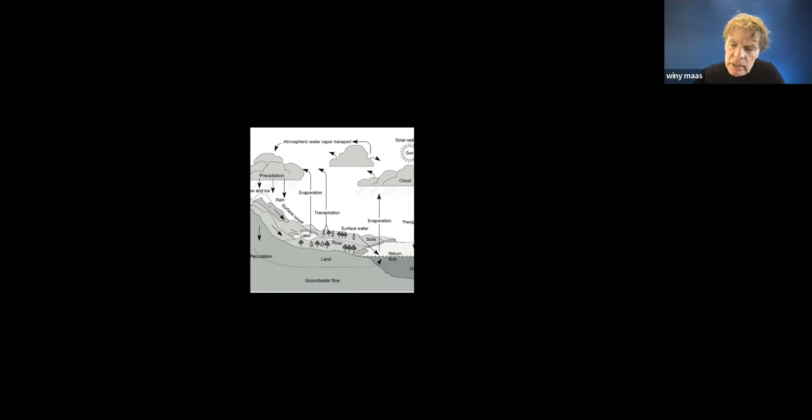Climate change and urban space. I would like to start by saying that everything we do is somehow touching the cycle of water, the cycle of temperature, the cycle of life and biodiversity, and what we do is interfering in that cycle, helping it or killing it.

What I would like to go through with you in the coming three quarters is this series. I want to talk about the monitor, how to measure our influence on this cycle, and then go to the almost chemical substance behind it, from oxygen to delta of temperature to water to watts and joules to CO2, and then end with what's next, the perspective of afterwards.

Chapter 2, the monitor, to start with, and there we can measure our efforts. At the moment we're trying to do it on two levels in the office. One is the carbon calculating, to see every time how good we are in that perspective. The second element, which has an urbanistic component, is the footprint calculator. The footprint calculator has more elements: lifestyle comes in, compensation comes in, the bigger scale comes in terms of mobility, and food production comes in, because being vegetarian is anyway better to help the planet these days.

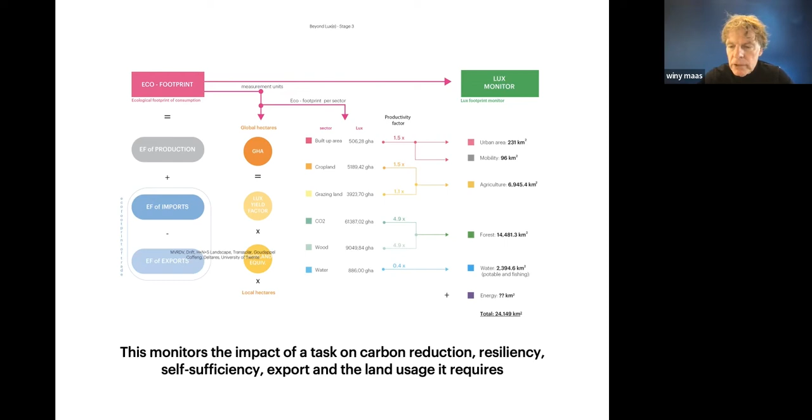So how do we monitor these actions and impacts? That is a wide scripting that this team is developing at this very moment. This monitors the impact of a task on carbon reduction, resiliency, self-sufficiency export, and the land usage it then requires. You can see on the right side it calculates this with every piece of action that we do.

If we look first at Luxembourg's footprint as it is now, with the tasks we imagine, and measure it with this ordering principle, then you could see that currently it has a footprint of 13.8, which is unusually high—on the same level as Singapore, basically. So if we do business as usual by 2050, we need 14 Luxembourgs to compensate for those activities. What we can do technically, with a lot of measurements, is bring it to 3.3 by 2050, having this effect of decarbonization.

This could also be done with the help of the neighbors, because they have lower density and other kinds of qualities, meaning we can do this action in an easier way. Then we could do it with 1.5 of Lux plus—that's what the footprint means in that case. This has a political impact, for the discussion of the different regions. It also has an impact on the speed of things—it could go quicker, even with a fallback scenario, and that's what you can see here.

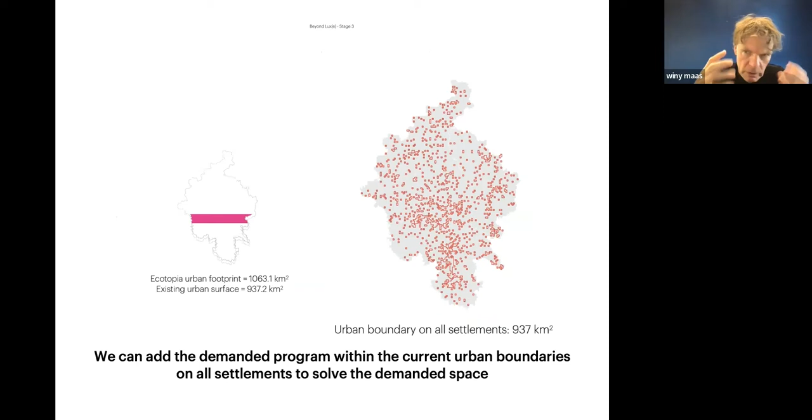I'll give some examples for urban areas. If we keep the urban boundary so it doesn't grow out of the settlements, and even densify the places which are over 100,000, then you get this kind of map.

You see the footprint calculator on the left changing. And if I do it even in key commuter cities to use that as a core, I get quite an effect, both on the map and a kind of stability in the countryside. Even if I imagine doing it only in the Luxembourg capital, which is doable, you get this densification.

It leads to a kind of Paris density, but it would also be beautiful. That illustrates a little bit how this slider works.

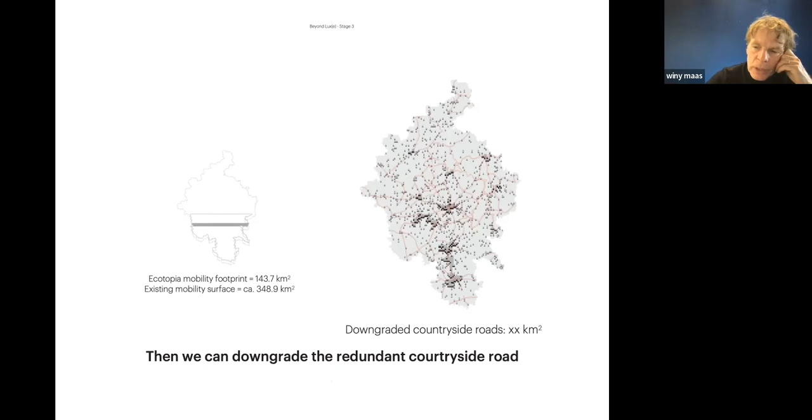For mobility, it's the same, connected to that, where we can strengthen public transport or other means like rapid train connections, and you see the map changing. Then we can downgrade the countryside roads, which is actually sometimes very stimulating, and ban through traffic in smaller entities, one of the measures taken into account to get that mobility pattern working.

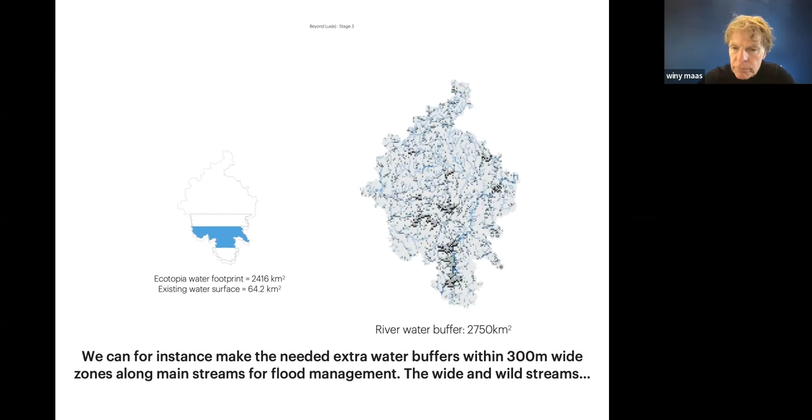For water, similarly, this is the water buffer needed for resilience, for not drying out, forcing a kind of anti-evaporation program in this area. That can be done in the rivers, widening them roughly double in width, and we can also do it locally around extra lakes, giving you a kind of sawa landscape that surrounds these components.

We can continue with the forestry part for the balance I was just painting for this decarbonized country or region. I need to add forestry, even though it already has quite some. We can concentrate it in the north of Luxembourg, which is beautiful.

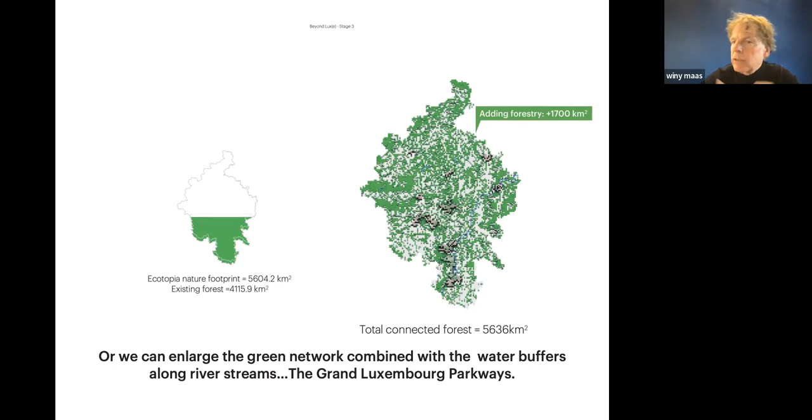Then it simply becomes a national park. Done. Or we can do it again around the water buffers in the valleys and next to them, and then you get this kind of network, which has other advantages. These things help not only to make acts but also to see the impact of a certain kind of act.

To end with energy, a similar question: how can we do it with agrivoltaics, always in a double layer so you can still harvest below? I'll come back to that later in the lecture as a tool to do it.

This is what needs to be covered in the landscape. And if we also add some windmills, needed according to many people because of vulnerability, then you already need this amount of energy landscapes put in. This is a lot, and there's a lot of discussion on windmills, whether you want them everywhere, because you also become crazy of it.

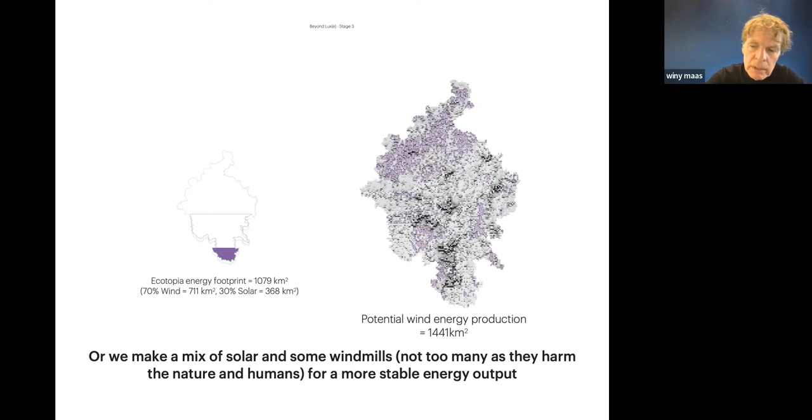That's a bit the task. Now overlaying that combination and interaction, you get these scenarios and directions coming together. This is done on the integrated map, and we can then zoom in. Here you see some of the zooms to illustrate it more physically, what it can do.

Is it good? Is it bad? That's for judgment, and that comes in. I'm very happy that the process is now starting to develop it more deeply after the first half year of study on this calculator, combined with all the juridical and political forces in this country and region.

I go to the next subject.

Now to go into the chemicals of our architecture and urbanism, say oxygen. We did this study on the Green Dip, a book which comes out soon, where we look to the urban mass, urban areas that is about 3% of the landmass of the world, larger than India. When you compactize it without roads, it's more or less like Madagascar.

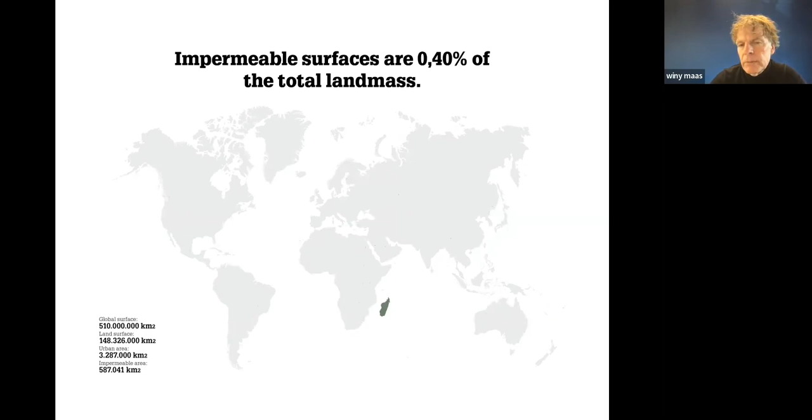This Madagascar-sized place has 56% of the people now, and will be in our decarbonized environment 68%. They behave actually heavier, because that means the cities of the future, the environment of the future, are responsible for 70% of the CO2 emissions, 60% of the fresh water consumption, and 75% of the energy use.

We take this to a global scale, and we can see that we would need to compensate already 3 times the planet to balance that out. That leads to compactization, also finding techniques and technologies that improve and compactize that.

For instance, hypothesis: if this is Hong Kong and I would greenify that completely, how much would that contribute to these different components surrounding the oxygen measurements? Or if I do it in Beijing, then suddenly Beijing becomes wonderful, I would say.

So we developed this green maker with The Why Factory at TU Delft to see how far we can come. It's basically a program that shows all the species of the world and what they need in terms of soil, temperature, water management, clipping, and what they give in terms of temperature drop, evaporation, or water captivation.

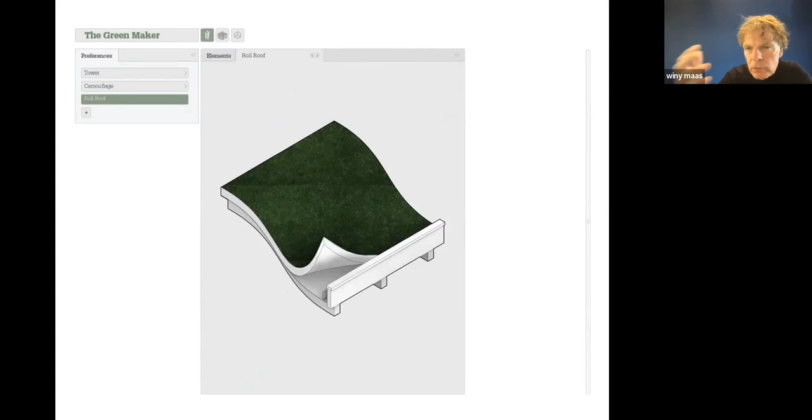Noise reduction. So if we apply that knowledge to products that you can buy in Walmart or IKEA, and see how that tile would look, or a roof, then I know what I can do with such a kind of material to improve it.

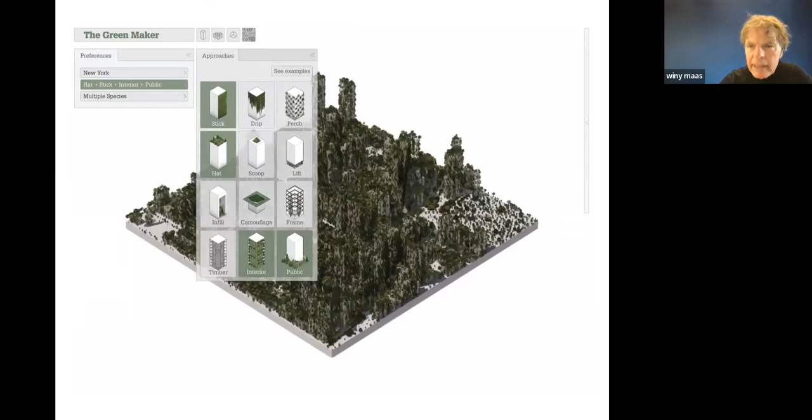If I then apply it on a canvas, like in this case a piece of Manhattan, somewhere around 160th Street I guess, what can we do on that place? I can choose material, clad that over our soils, our roofs, our facades, and into our interiors, and see how much that would help for this piece of Manhattan.

Quite a lot, in that way. That is more than I expected. This is a beautiful Fifth Avenue at the moment, and it becomes somehow much nicer when you go around and see how Manhattan goes from a brownie to a greenie, and then later to this kind of interiors, is what this effect is showing.

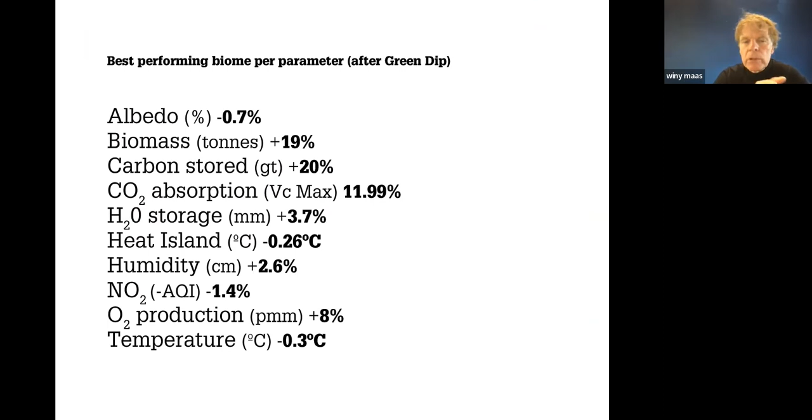So what would that mean if we do that with all our flat roofs only, not only the facades? Then the albedo will go down a little bit, the biomass continues to go up, we produce plus 8% of oxygen, and we drop temperature by 0.3 degree over the whole planet, which is substantial.

This goes hand in hand, of course, with biodiversity as the next task to do. The book that we are now preparing, also in The Why Factory, is to calculate more or less the habitats that we can produce with that.

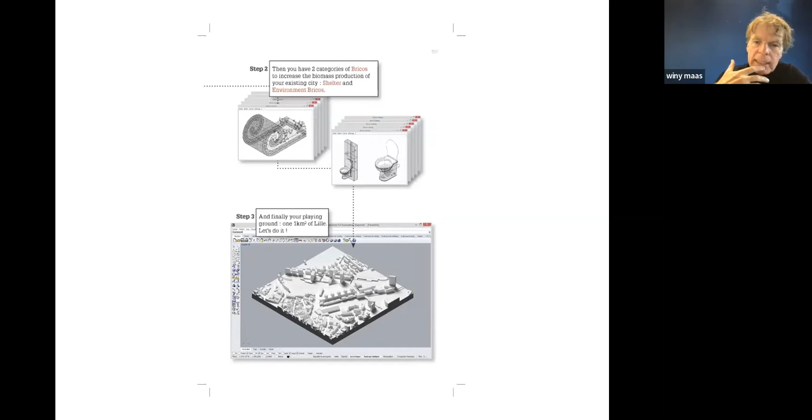So that's based on food chains that are interconnected, and calculates basically the surface and the treatment combined with the products that I was just describing, applied on canvases like below in this slide.

You see some of the products made with different companies, and how that could be imagined on the facade, on the roof, on the streets, leading, like in this case of the North French town of Lille, to somehow a 'wow, this is better than Borobudur' kind of feeling, and how our fellows are living in this. How far do you come?

I don't say the wolf will be here immediately, but all kinds of amphibia will then also be in the center of our towns.

And do we hate them then? Do we want to protect ourselves against mosquitoes? Of course. But then you have to compensate again with other kinds of birds and other kinds of predators that help out in our exercise.

How do we apply that further? I'll give you some cases. In Rotterdam, for example, Rotterdam used to be nice, cute, Middle European, and then boom, it was bombarded in World War II and flattened out.

And at that moment, it led to an urbanism of objects. Some people say it's bad, and they refer sometimes even to Las Vegas. On the other hand, if objects are nice and kind, if they show generations, and if the next generation has respect for what was before but adds or compensates, then it's actually a kind of intelligent dialogue. It's almost like egos become we-goes. That's what's happening a bit in Rotterdam, with this kind of responsibility in combination with respect.

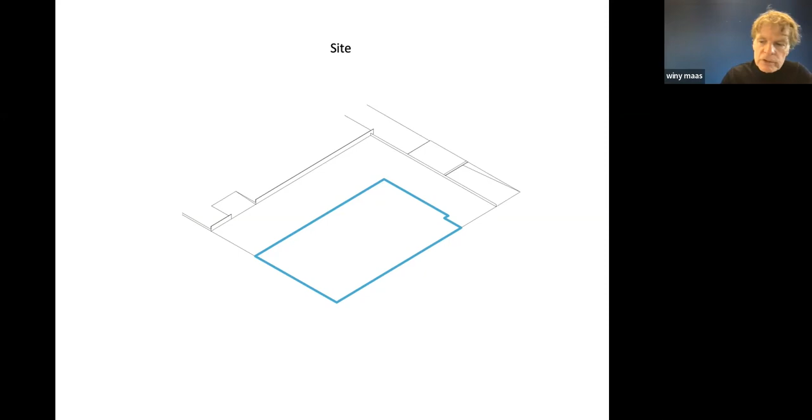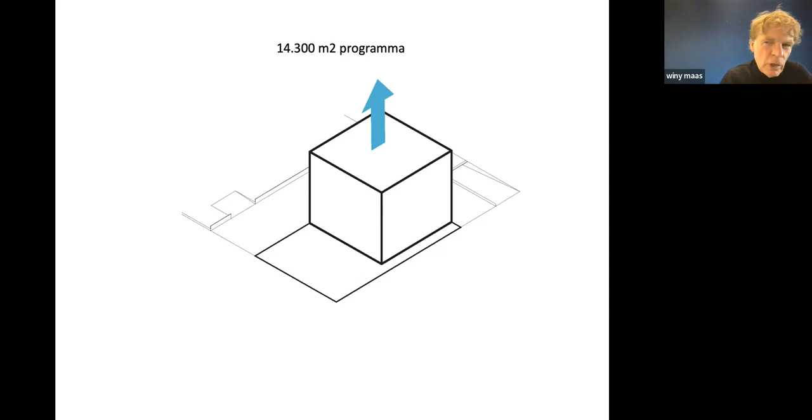There are, of course, routes in the park. This is the program. That's big for a park to put in. So how can we make a building that loves the park, or that people start to love and understand that it contributes to the park?

By making it, say, circular, you can walk around, no corners, no danger when you walk around. We shrink the footprint, minimize it so that the plaza is big enough and the effect on the foundation is concentrated.

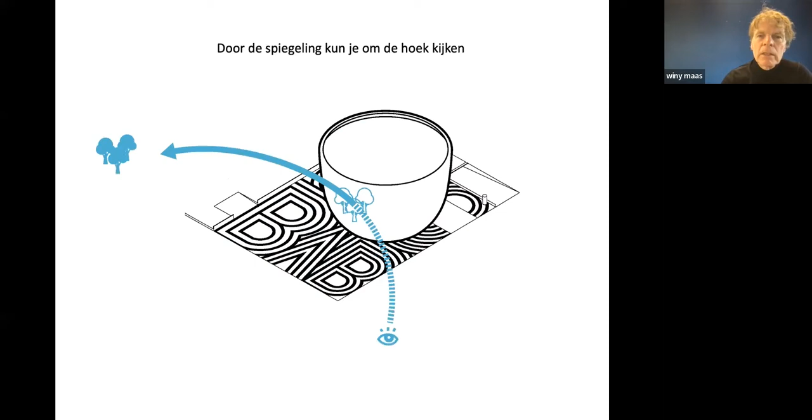Then you make the roof terrace as big as possible, and that leaves space for all this routing. If you then clad it with mirrors, we could imagine that the plaza looks bigger, that you can look around the corner, and that you can see more sky, echoing the famous paintings of the Netherlands by Ruisdael and the 16th, 17th century.

And it's a way also to host the trees of the park and put them on the roof, turning that into a collective extension of the park.

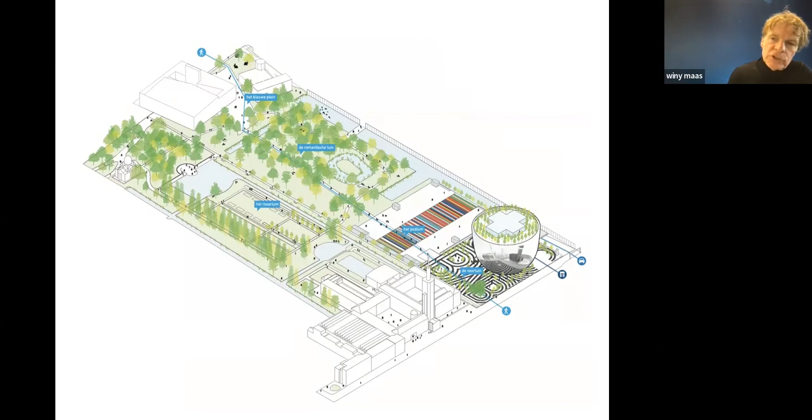Then I could imagine that it forms a part of the park, this sequence of rooms, the museum park in this case, that have been made over time, where this is the front room advocating the relationship between the small spot and the bigger park.

Because it would change this perspective to this, where I can see myself, I see the artist, I can see the canvas, I can see the park, I can see the sky, and I can see also this Fata Morgana on the roof.

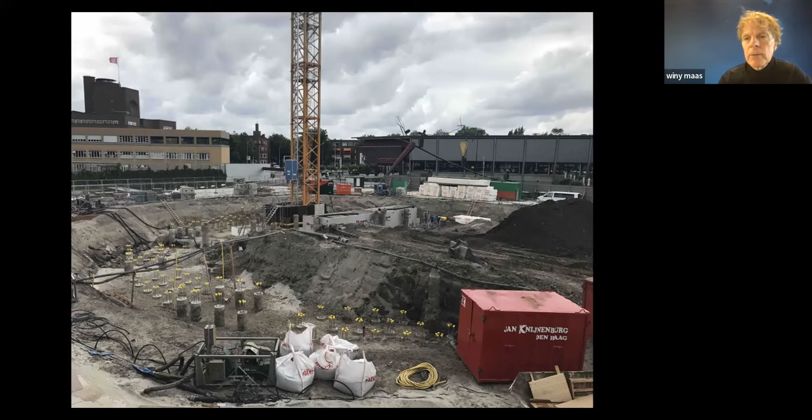This has been made with the least amount of impact on the water inside. So small tube foundations are made, a bit wobbly, then stabilized with this ring on top, and that leads to this—it's actually a kind of boat that has been constructed at this water level.

It's clad with mirroring glass made in Shenzhen, made by computers, triple bent—the good thing with glass is that you can recycle it and bring it back to the oven, and then you can do it again if it doesn't work out. And that is how it's tested.

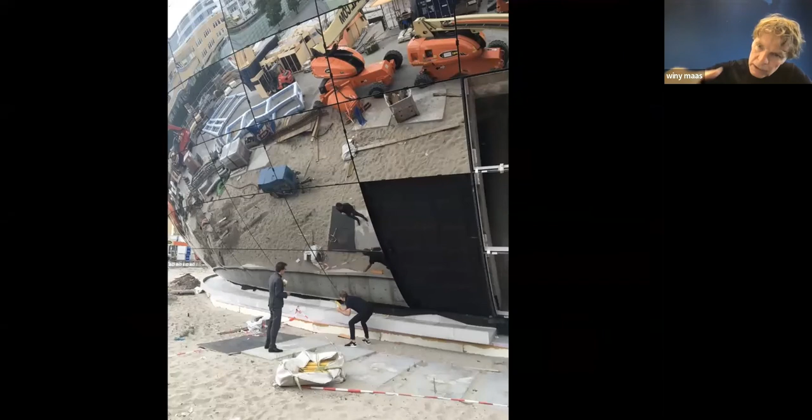And even the lowest part is the flattest, so that it becomes horizontal, expressing that this Ark of Noah is floating almost on top of our sea.

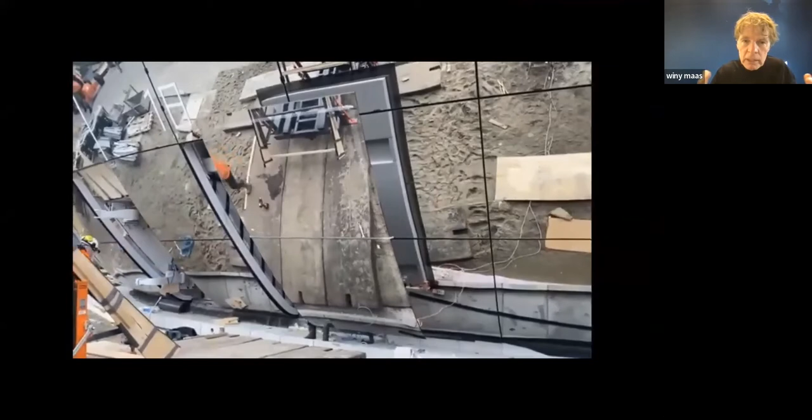Then you make doors, like James Bond, opening themselves in a slow way—it's perfect. When it's closed, it opens up, and then you can go into this depot, celebrating the opening act of an archive building.

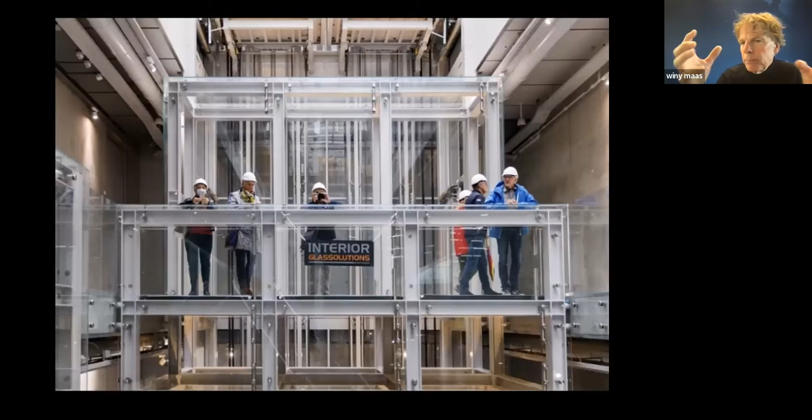And then you enter basically this prison, you can say, but where all the five different climates surround this space, a space where you can walk through, where all the travelators and lifts are in, where many boxes are hung to show the art, to pull it out of the racks and show it here, and to understand. You can then look from the back to the art and to the front. You can even walk over it at a certain moment.

And then the surrounding streets, you can open the windows and the doors, you can look at it. You see this random collection—no, not random, scientific collection—of different buildings, different pieces of art. And they are sorted by material. Paper has another kind of climate than paintings.

And then you go in and you can open the racks, and with the help of the people of the museum, you can find this collection. Actually many surprises, when Ruisdael is next to the Mondriaan, or amateur art is combined with high-end art. So the journey continues, you look more up, you see more art, your temporary art piece where pieces of the collection are gathered and turned into this carpet where you can walk.

Over it, so you can walk over the Mondriaan, I would say, and see how the effect would be at that moment. And then you end your walk on the roof with a restaurant, which is an art restaurant where things are brought in. Every space helps to get a piece of art in it.

And in the forest, I want to show that forest because it is kind of a tech forest. They are planted, these trees, they've grown the last four years. They have flat roots, and these roots are intertwined so that we make this connective soil. They are shielded by windscreens around it, and with the pockets in between the buildings, and that leads to this experience. So this is after one year of planting, now to be seen as another place to exhibit.

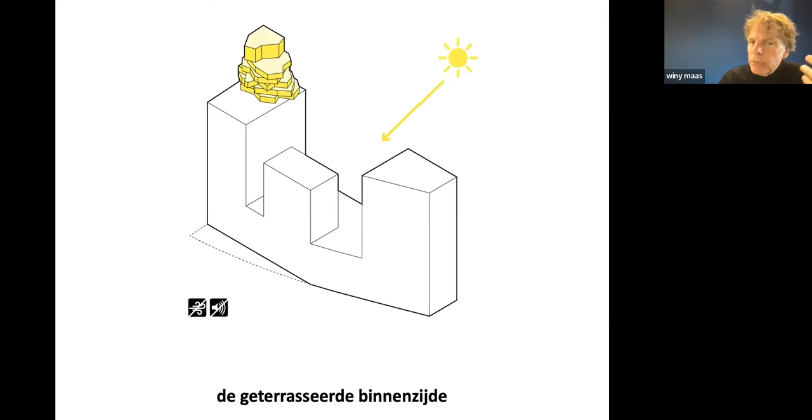I take you to Amsterdam, to the local business district, where we add a new mixed program, which has this volume according to the urbanist: three towers and a plinth. But you know, it happens everywhere, where we scrape away these towers so that I can make terraces and bay windows that help each other and bring it to the bottom, so that then I have like a scraped away, new block that shows the transition from a classical environment, which I still respect, to a business environment with mirror windows, and then bring this new life into that.

And I plan together with Piet Oudolf this green valley and test how it will grow with planters that are part of the houses, not sticking out in that way, but part of the whole operation, and then it becomes this kind of object with this kind of render images that we know.

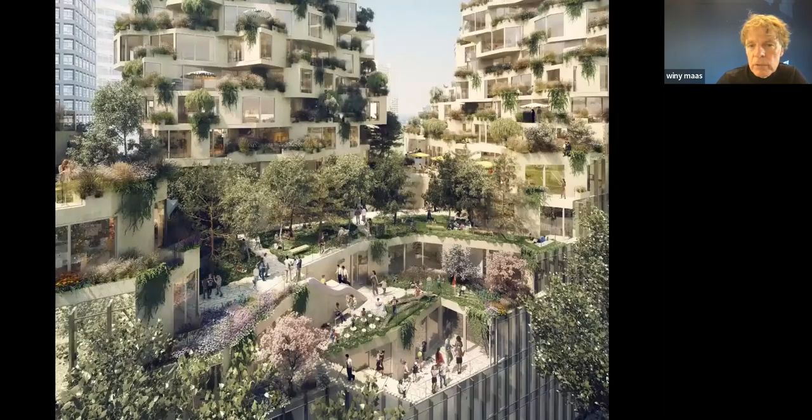And of course, this needs to grow, I'm aware, and Piet warned me also that it takes time. So we need to train our plants like we did in the depot. And that's what we currently are doing.

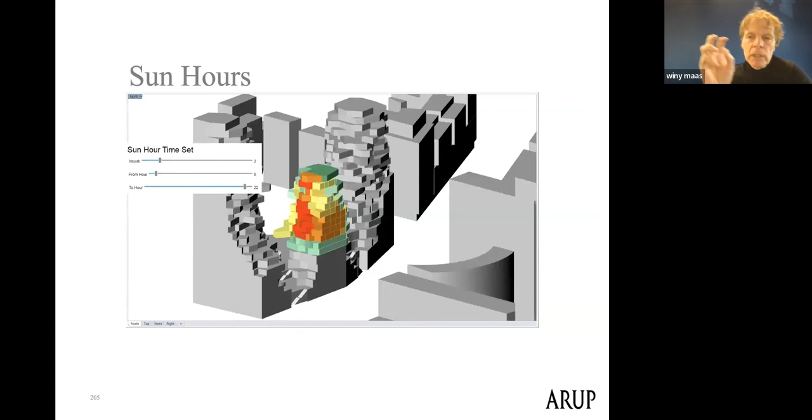We need to script that complexity because of the wind, the sun hours, the costs of developers. You see it inside and outside. We have to check the sizes of the terraces and the windows. And this program also, again, balances this out. And that is transformed into this Revit model with a structure behind it, with all the ductwork that's needed for these landscapes, and to bring it in, and leads to this building as it is now.

So I take you to walk through this valley, where people live and can bring beer to each other. Every Saturday I imagine there will be barbecues, and the building will turn into a smoky area, with people always having these trees as part of it. The irregularity makes housing that always has an extra space where you can sit or put something you couldn't otherwise.

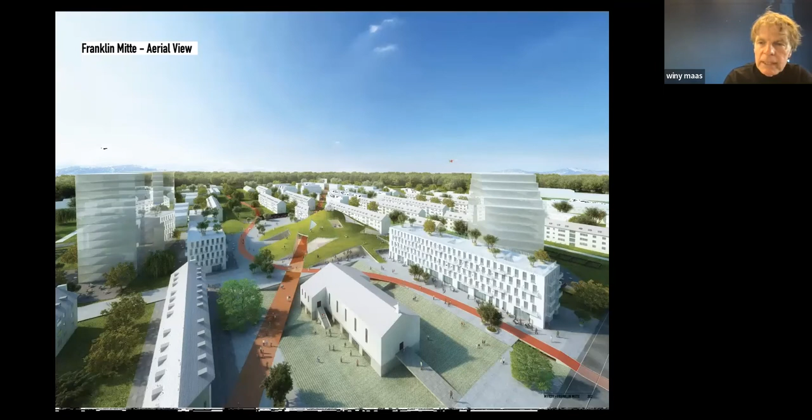We continue. In Mannheim next year, we make this hill on top of supermarkets to get rid of the boxes that are normally built, and it becomes a viewing point to look over the city. Here's how it will be built in wood.

We do it like this: you see it happening with the soil and debris that we need from other buildings, then we put this forestry on top of it, and we add one building — a remnant of the military base, the American military base that was there, to give it almost like a pedestal.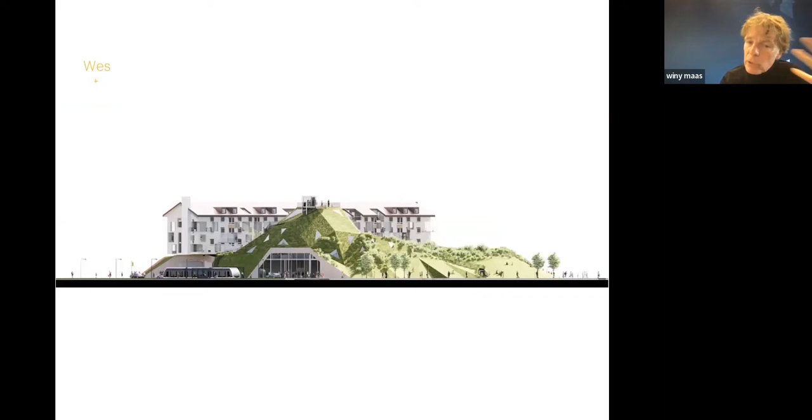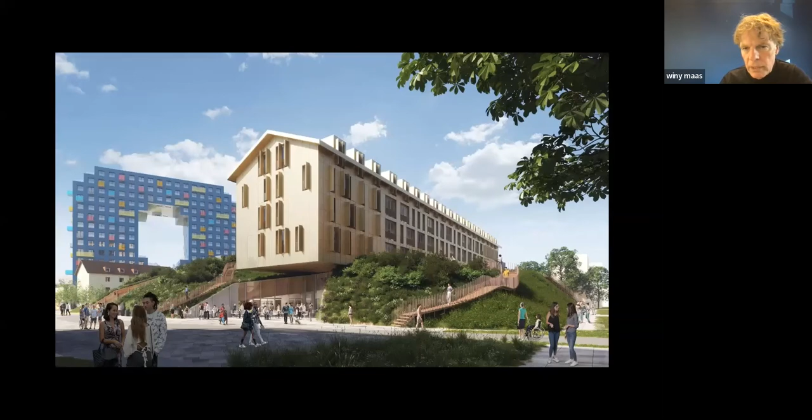Here's how it will look, how the renders are made, and how the technology of the hill has been developed, and how you can later walk over this, and how the wood-clad building of the former base is respected and shown, sticking out over the entrances with the high rises that surround it, leading to this intervention. We are under construction at this very moment.

Next chapter, Delta T, the change in temperature. I spoke already a little about it with the green dip, but we try to do it in more ways. I give you an example in New York, where we split a high rise into more volumes to enlarge ventilation through it.

It's at 181st Street next to Amsterdam Avenue, where the surroundings are these kinds of brownie blocks, with a lot of colorful plinths for a very mixed population in that area. So we thought it might be good to use that format, but also to demonstrate that these block sizes could be stacked and turned into a high rise, introducing this kind of vertical village in this part of Manhattan.

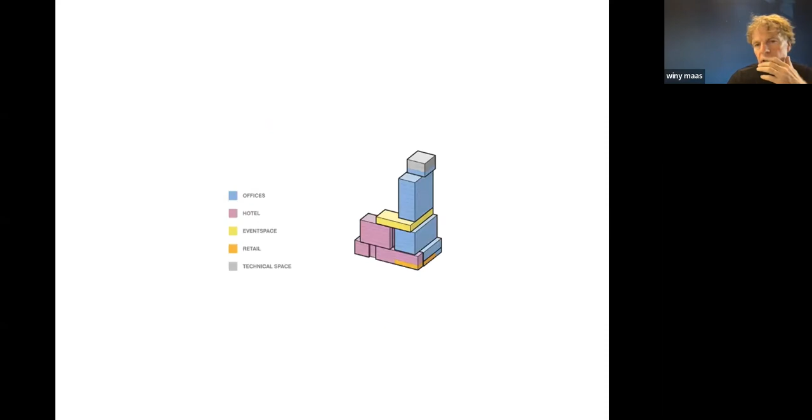We make that very clear, so whenever you come from LaGuardia in the future, you see it as a token. It's a mixed program — every block has another entity. In between, there are streets to go through it.

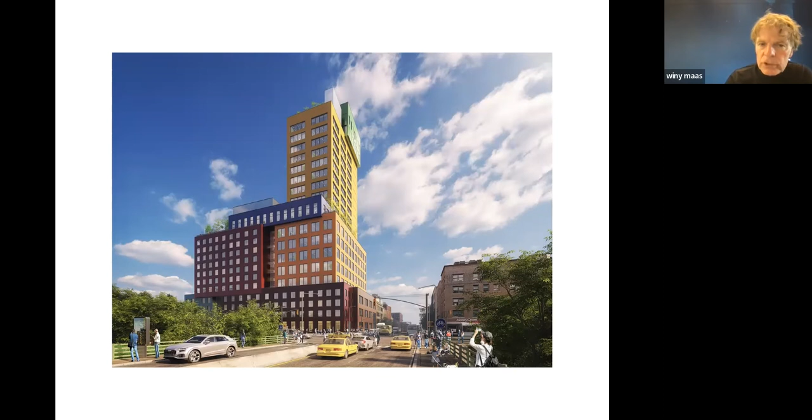So here's how this stack has been imagined, with the hotel, the housing, the offices, the bridal room, and the marrying room in it for this kind of population, referring to how the users can use it, taking the scale of the surrounding and glorifying it. Yes, there's a brownie in it, but there's also a bluey or a greenie, and that leads to this object that wants to be slightly gayer than its fellows that surround it.

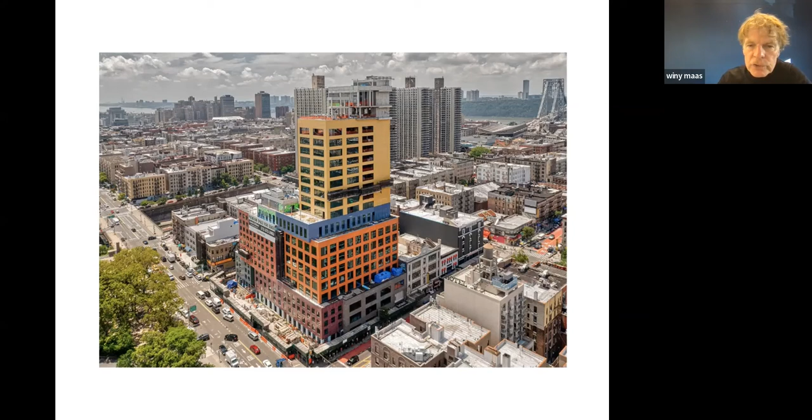And here it leads to the slits in between, where we can work with the detail. This is the situation as it is now, how with these different tiles we can make these blocks and turn it into a device that partly cools the environment through wind channels in this part of Manhattan, and makes it also a more social environment.

We continue with that methodology in Detroit, in this area in the heart of Eastern Market, the beautiful area in Detroit, where a lot of things are happening, where you can walk around, and where it has this kind of artistic atmosphere.

The sense of doing things is happening, and it has murals all over that express it. It's a beautiful collection of artists that contribute to different festivals.

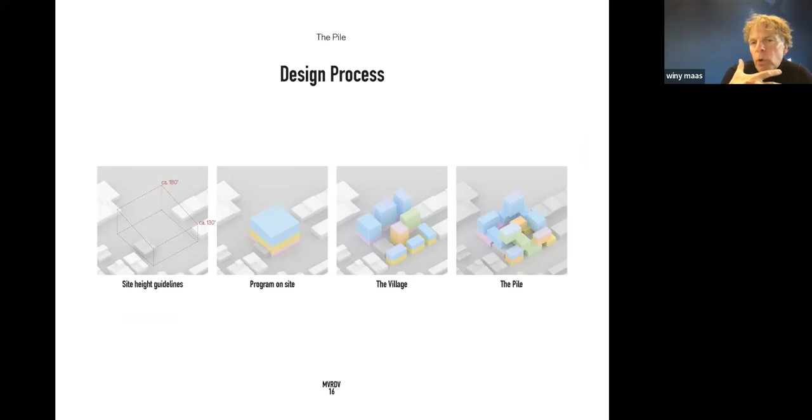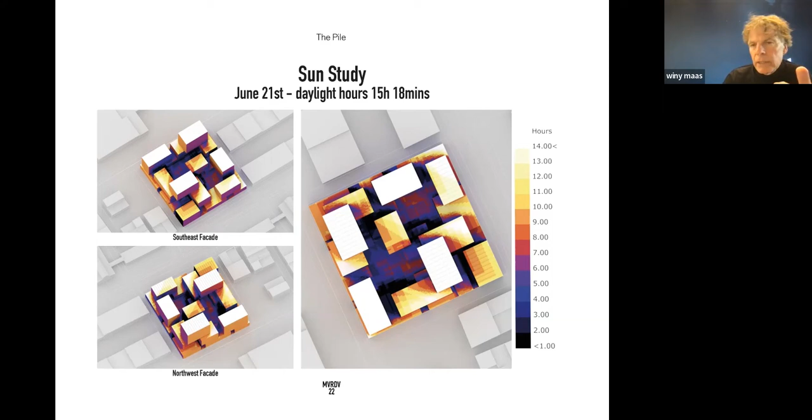It turns into a village that is not only a known village but also a three-dimensional village, a pile as we call it. This is how the pile looked in the beginning, and how it also works as a ventilation piece to create a combination of shadow and sun during the year, with wind and non-wind also during the year, so that in this varying climate, Detroit can be minus 20 degrees Celsius or plus 30. So how to mitigate that with an urban environment that can serve both.

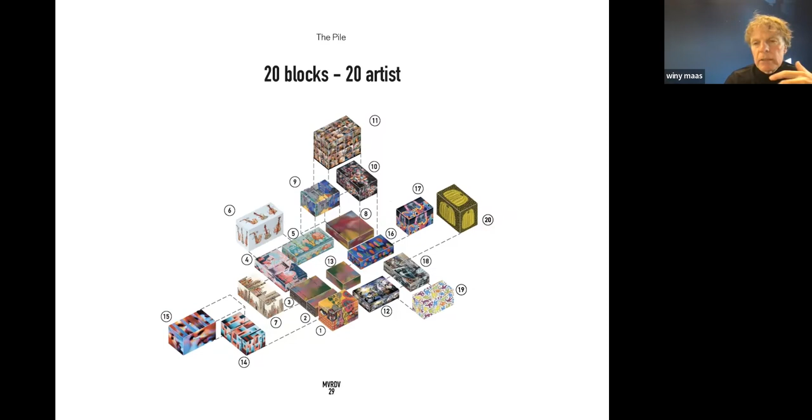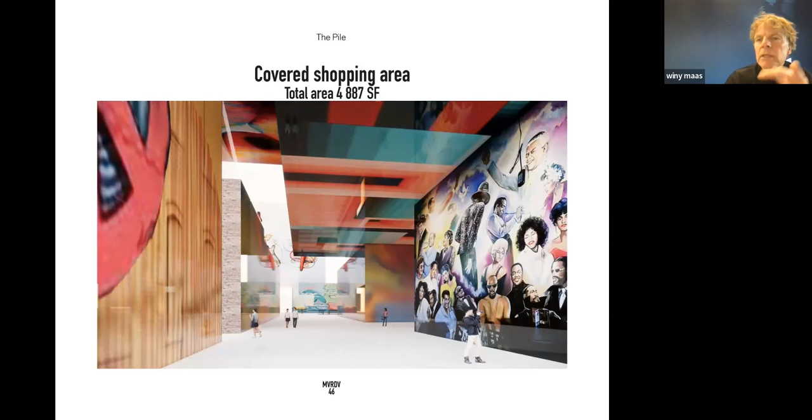And then we asked 20 artists to help us make the facade and somehow petrify this art. You see it here, how that would be with the murals printed in glass. You can walk around in these climatic, narrow in-between spaces, and they become almost like a gallery plaza or an art village, with all the program inside: housing, hotel, some working spaces, and some commercial spaces up to the rooftop terrace.

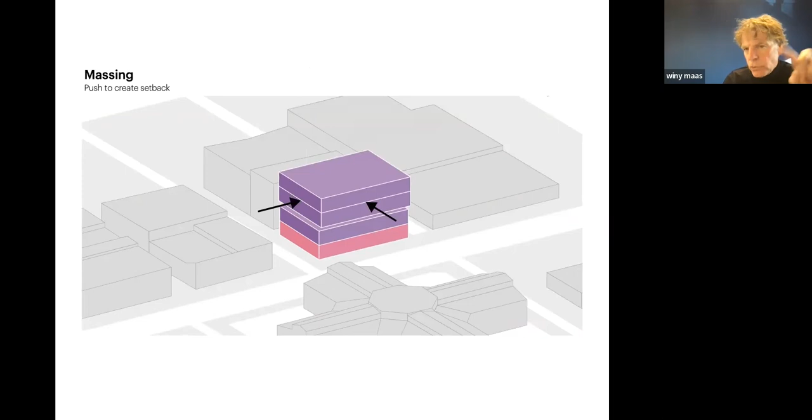We start with block one, building one, on this spot. That's an existing building with murals that we need to demolish. We make a new massing. We push in because of lobbies. We push it out to create setbacks and also ventilation components. We add an element on top, and then we start to imagine that with three artists we're going to work on this stackification.

We start with the bottom, inspired by and working with this artist, put that on the historic layer, and turn it into this painting as it is now designed.

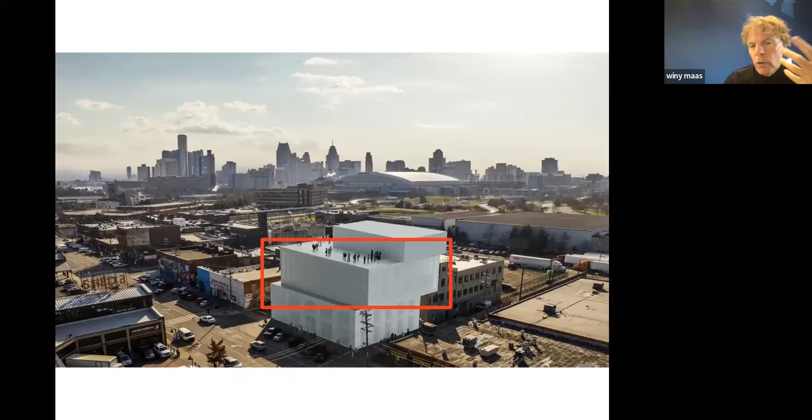We go with the next artist, Sheefy McFly, who wants to do this. With these openings he accepted as windows, and with a changing mural, a new technique, with a group of artists makes this one. That leads to this first, say, advertiser of this neighborhood, an extension of making density, but combined with this climate machine that we can imagine on that spot.

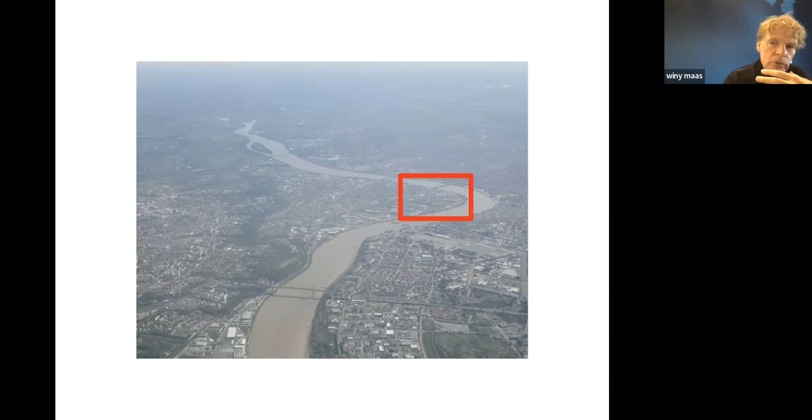I go further to Bordeaux, in France, a southern city, quite hot. How to deal with climate change on this peninsula, which is a former military base for Napoleon, with a lot of tracks and a lot of halls.

We said, okay, let's use the traces of the past, that's the base for the urbanism, something you can build upon. Then you have in-between narrow streets, six to ten meters, depending on certain elements. And in orange, you get the inverse pieces.

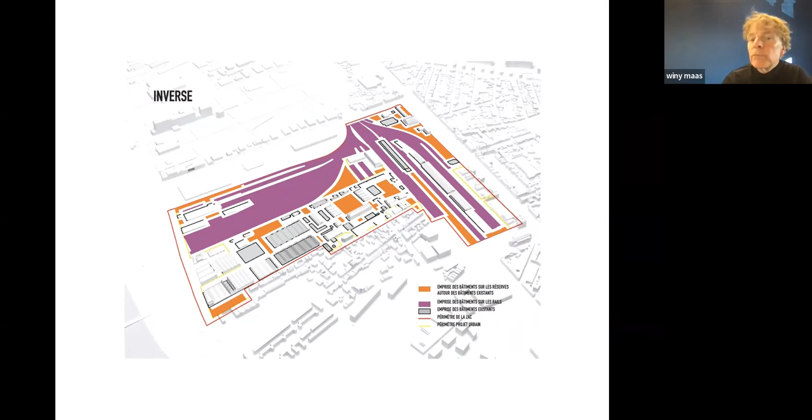That leads to a beautiful pattern, by coincidence of streets, that looks like Rome in a way, or like southern cities, where I don't need everything for driving, and I can have places like here in Amsterdam where you simply can sit. If you extrude that, then I get this almost Hong Kong-like feeling. But that is not the issue.

But if you trim these roofs, and say you want to live on the ground floor at 22 degrees, I get actually a wonderful roofscape. And if I also modify - and I'll explain that later - the sun exposure on the different directions, north, south, east, and west...

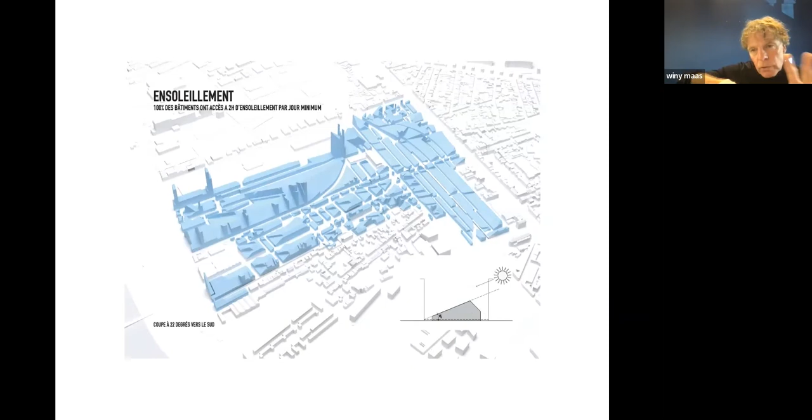Then I get this. And if I then apply extra open courtyards for natural ventilation, and I work with 126 architects on it, and use photovoltaics and energy on most of the roofs, then this is what I get. So here is the model with the streets, with this amazing roofscape that's like a sculpture addressing the climate answer of this area.

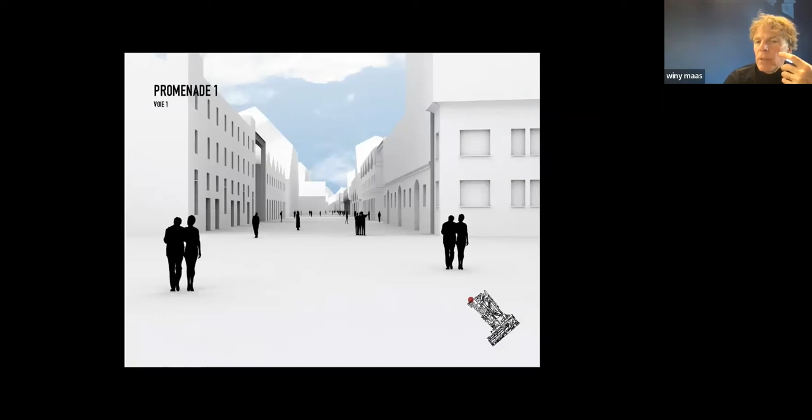If I walk to the future promenade, I see this happening. It's combined and it's super rich. And it's based on these principles.

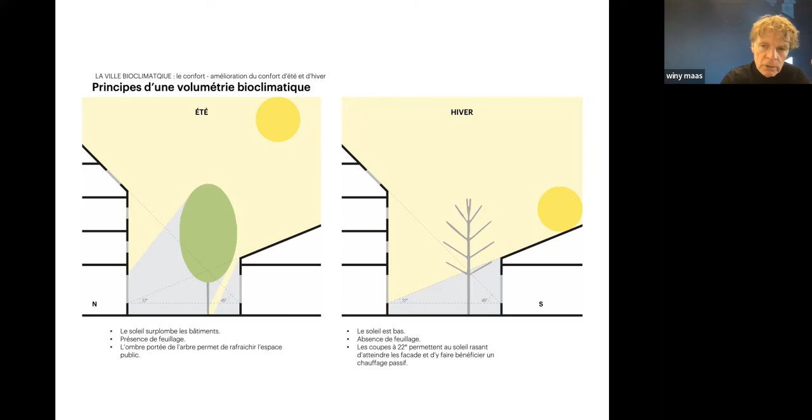On the left side you see what it is in summer: I have sun, and then I need a tree to protect and shelter it, beside what the buildings already do. In winter it's the opposite, sun comes to the lowest space, also in the street, and I use bare stems to achieve that. That arranges the climate in Bordeaux, and it's been tested in our computer models, with and without trees.

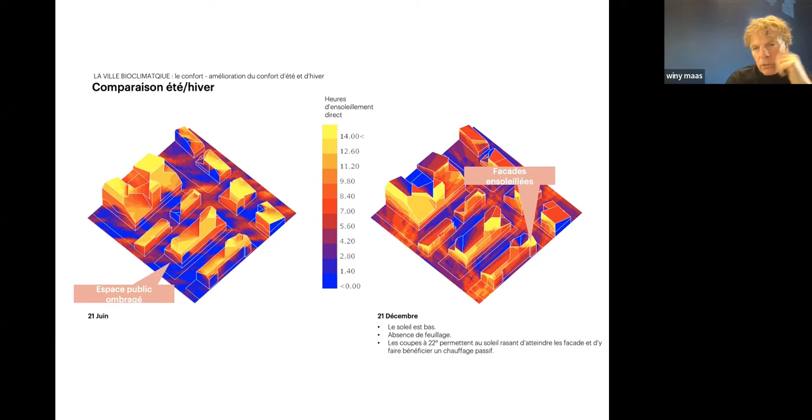On the left side, you see how it works in the middle of June. In blue, you get a cooling effect. On the right side, you see that because it's only a couple of percentage that is shaded and cold, this is the planting plan we need and how it will look in this combination of whitish volume for the albedo effect. Reflection is needed immediately, along with the greenification of the sun stopper in summer, and how that mixes with these narrow streets of different sizes, with this kind of green gutters.

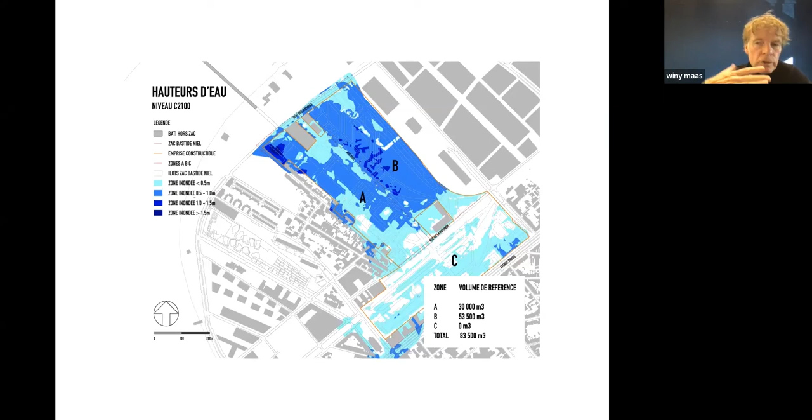This is helped by the water. There's a river next door, and we keep the water under the houses in basins—every house makes a basin. This helps store the water, but also to use it in the dry periods for the trees I was just describing. And you see this kind of cellars that are there.

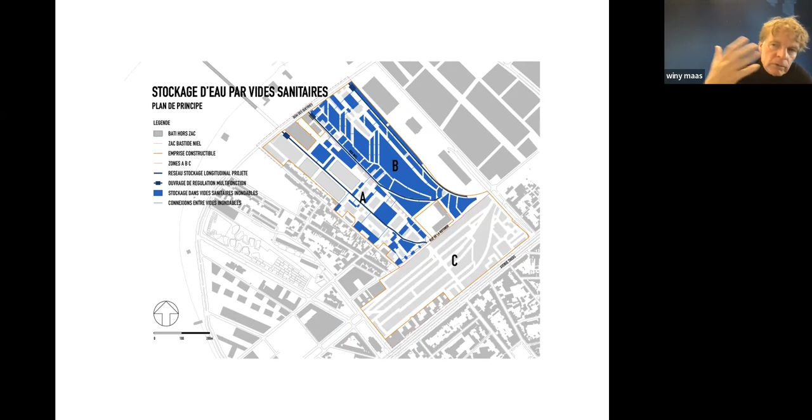You have to change the law a little bit and have another kind of insurance system. I'm aware the Dutch have done it already for a long time. This has now been applied in France also. And then we build it like here, the products that are there.

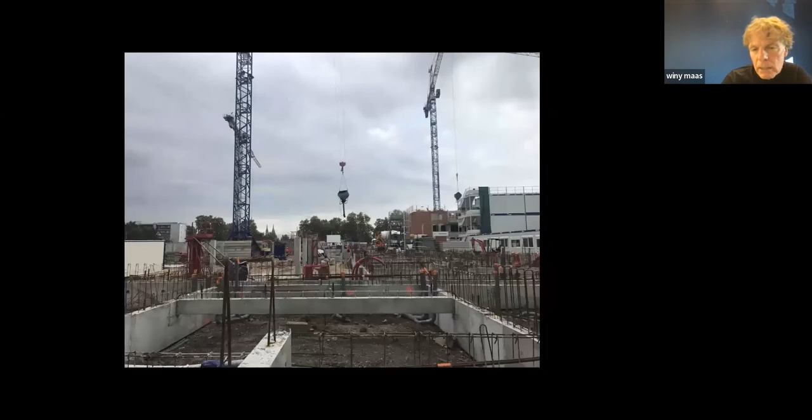When I am in Bordeaux, I see stuff happening on the other side of the river—you see this kind of basements appearing. And like in Pompeii, if I go there, these are the cellars, the places where the water is kept. Then they make small and narrow streets, and you can make it higher when there's a widening plaza. You see the effect in this situation, and then the albedo elements come in to transform it into this whitest environment.

Here with the trees, we start to plan how the streets and cute little streets are made, how the ventilation and the open blocks in the back are now planted with these trees and with another kind of material to cool it down, how the links are made between the streets and these courtyards, and how now this kind of mountains are appearing in the landscape of the Garonne and the landscape of Bordeaux.

Next chapter: water. I already talked about it in Bordeaux, but in Tainan what we try to do has an effect through using water on different levels, for popularity as well as for cooling the town. This is Tainan as it is now—it used to be lush and beautiful in the south of Taiwan, but it became this horrendous gray city. What's happening here, you see a Chinese department store that could be transformed into a plaza. Can we use that plaza to cool the environment?

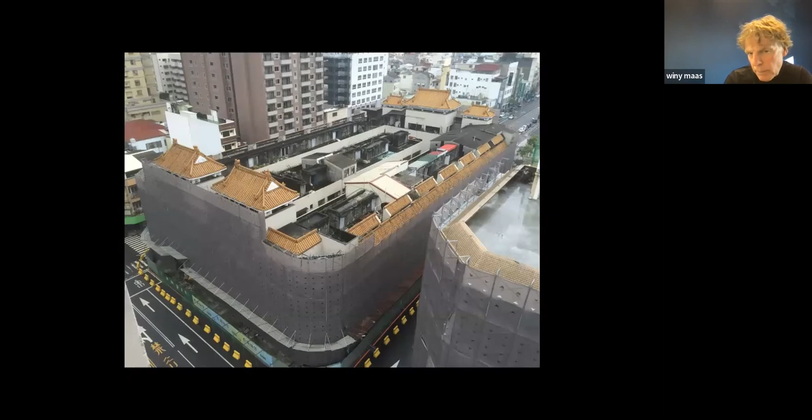So here, that's what is happening—we are getting rid of the buildings. We keep a part as a kind of ruin that helps have an inertia to store the temperature in it. And then we add water, a fluctuating basin where you can swim, go to with plants that keep the temperature down, as we imagined in this case.

It's made by a new kind of concrete that extends, and that led to a usage that became very popular because it's the coolest place in town, literally and figuratively, to hang out and be. It's completely public—you can eat your sandwich. It's just like Central Park in this place, but where the trees now grow and keep that temperature in this pocket, and it becomes like a refuge basically for day and night.

It's open 24/7. Kids go to swim, and you also see a transformation of the inhabitants gradually—in Denmark, you would of course swim outside, but in Tainan it was not so obvious. Now it's happening.

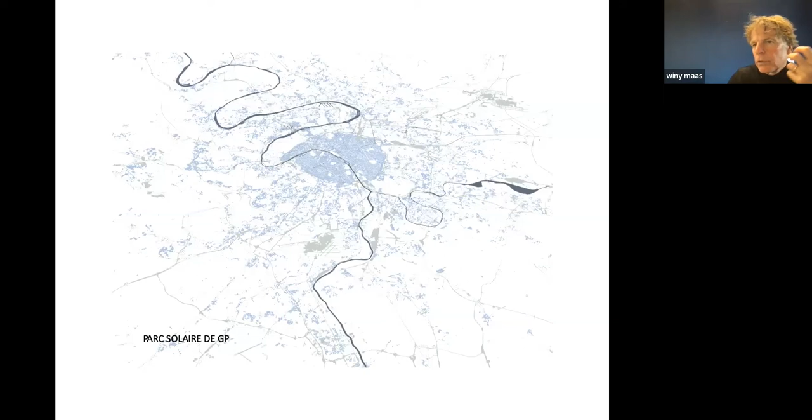Next chapter, I go to the energy part. A while ago, we worked on Grand Paris, 10 years ago, and that is now also developing acts, like in Luxembourg, to make that city better. One of the acts is what we call the solar park of Paris.

It means that all the roofs, any new building, but also renovations of buildings, have to have solar panels that would transform that. And if you do it, you can have one extra floor. There you already get a lot of tax income from that, so that helps a lot. That would transform this kind of known Haussmann-oriented Paris into something like that. I know it's a shock.

But on the other hand, here you live with this new potential, and now we're making products that fit in the zinc, in the material that is combined with that, so to have it adapted. So I'm super happy, 10 years to start with it. Now it's all over - you make an act and you transform Paris into something more contemporary.

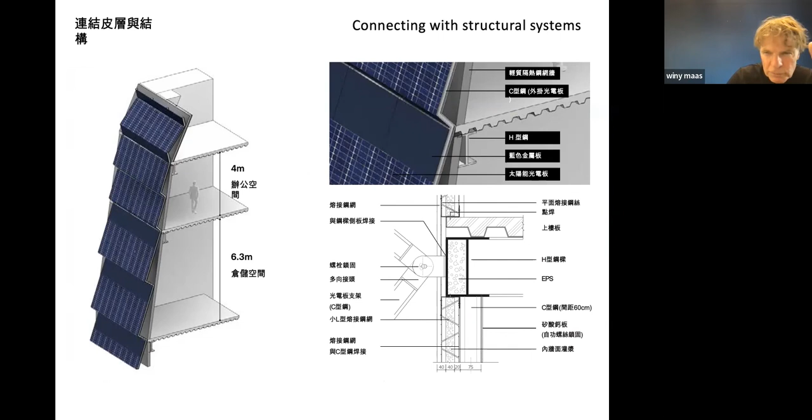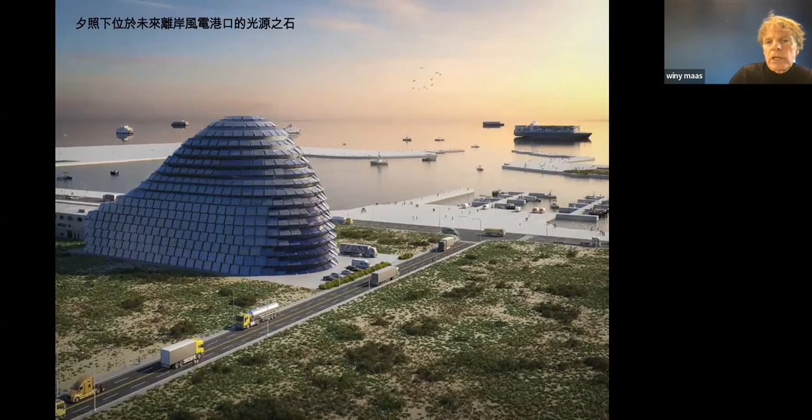It is currently under construction as a beacon on the edge of the island, like Easter Island, more or less. You can find this solar monster almost coming up. I take you to Penang.

Penang is a piece in Malaysia. Here you see it is an island, and then I take this notion into a next step. Penang is growing, more people are living there. It's one of the harbors of Malaysia, and it needs to facilitate that with new housing areas, and wants to do it in a nice way on this part of the coast. Here you see how the current sea is with fishery moments, and how to add new islands in it.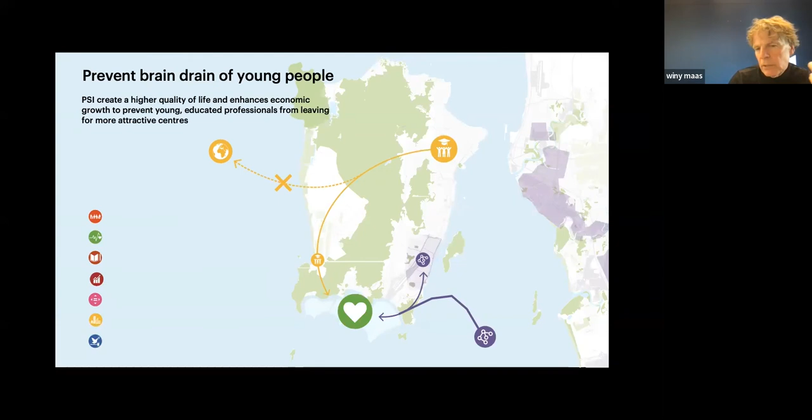So how can you do that? On that, it is needed to relieve the pressure, so it will create this new metro line. It makes a new urban concept for the island, and creates space and attracts people and avoids brain drains. And it leads also the moment to reallocate the airport that's now on the island, to put that in the bay in between with this islandification.

This is the base model plan. They first thought 3 islands. Now we said, no, let's make more, so that you can have more length, more infiltration also by fishes and by the tide, and then shape it so that they funnel it towards certain directions and spread out again. And gratuitously, you get this kind of 3 flowers almost in the sea.

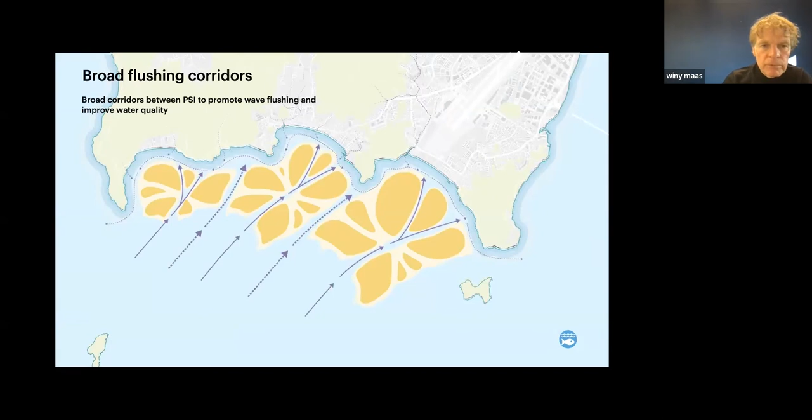This is the distance to the shoreline, how the flushing corridors are broader, how the internal flushing canals are narrower to create this pressure difference, and how they create view lines between the islands. This creates breeding grounds for fish all over, with tidal landscapes that manage that fish production and biodiversity.

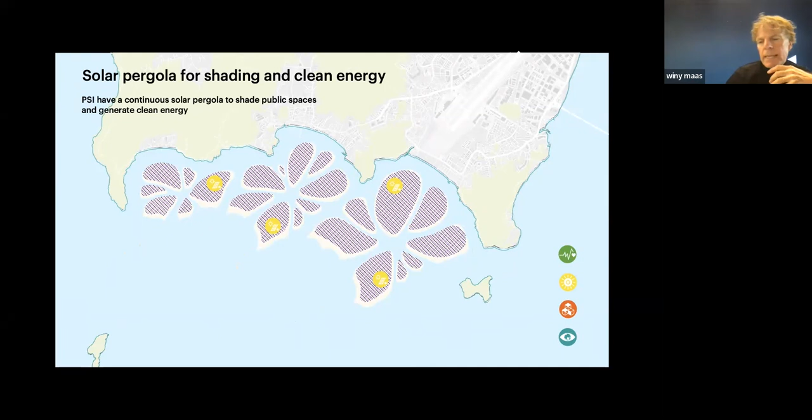How it's connected with the kind of zigzag line, how it leads to this greenification, and how we use a solar pergola for shadow and for creating an optimum energy balance. This is the new solar forest, as we call it, and that is based out of these kind of elements that are on top of the buildings that help to make different ventilation movements that you can do and improve the comfort.

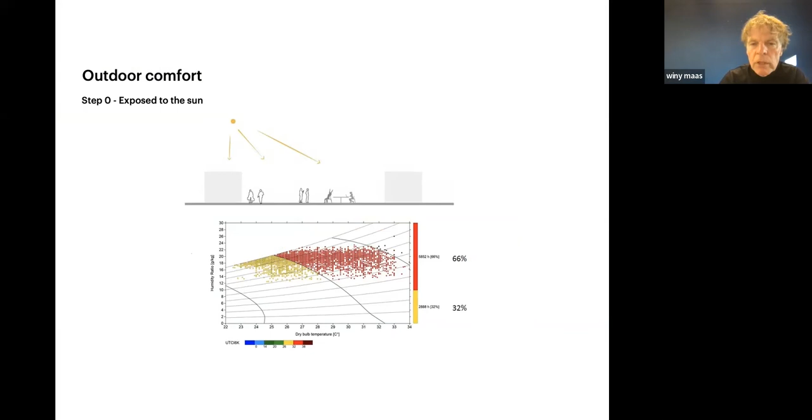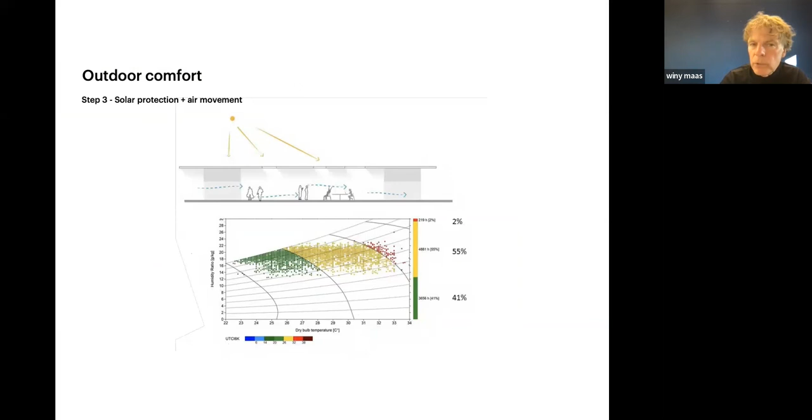So here a diagram exposed to the sun, how the temperature would be a lot of red, how with solar protection it would already become more yellow and better, how with air movement it becomes even more green, and how with greenery we could even, like in Tainan, do it even more. And especially with the waves that are coming out, it helps to do this ventilation and creates this kind of pergolas next to you and on top of you.

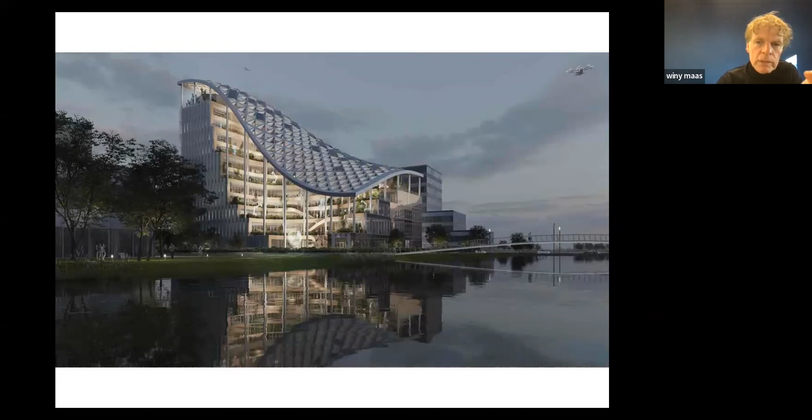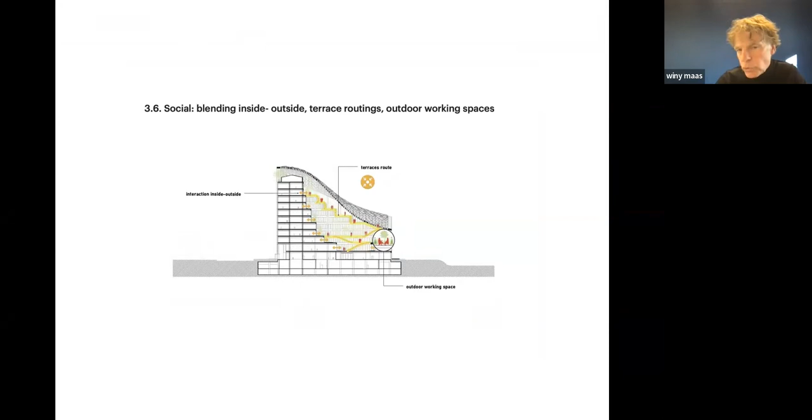As we speak, we are working on that also in Shanghai, where we did this as a prototype for a new headquarter building, where this device is now mounted on the new building, a wooden building, where this ventilation shaft is done to combine solar cells with cooling. So this is the sun production that we do, the green terraces and the ventilation for the offices, and the capture of water that we can do on these terraces. And that leads also to a kind of blending inside and outside for people, a sustainable machine.

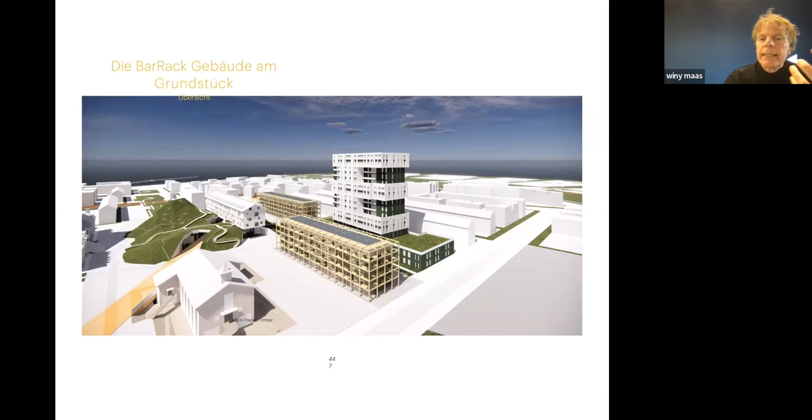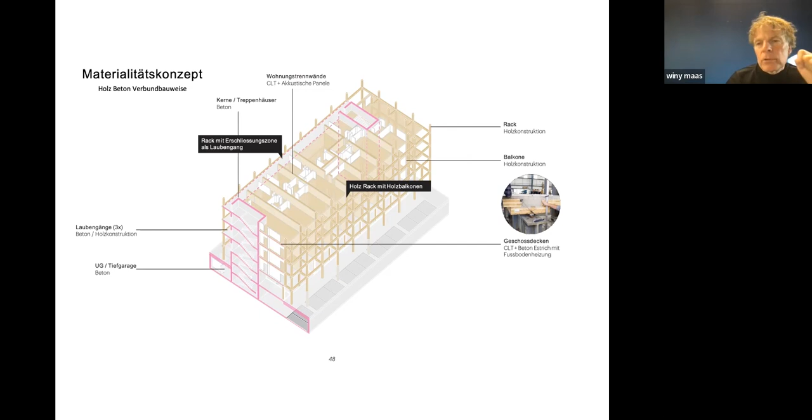In Mannheim, a next step, how we try to do it in a kind of rack, so they have more shadow on the edges. You explore this at the moment, and that's an interesting component—you cannot do everything in wood. Sometimes you need fire coating concrete, or elements for inertia and climate. That differs so much between countries that we try to make this comparison all over the world to see how far we can woodify these buildings.

So here's the German example. Happy in Sydney, another example of how to make high rises out of it. You see pieces in steel and pieces in wood, and you have to disconnect them by a slit of ventilation and a slit of protection.

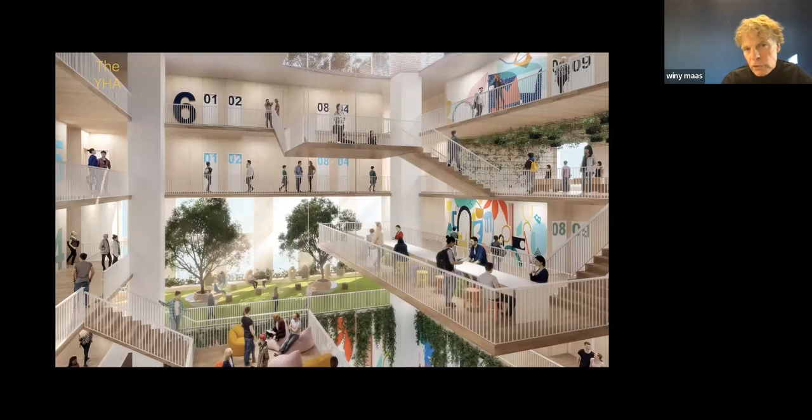That leads to what we try to do in New York and in Detroit, that can also be done in a wooden version. You see how the structure is imagined as slits of steel between the wood, leading to ventilated spaces in between. The ventilation goes into the cores in these atriums and leads to these wooden offices.

I end with what's next, of course. I just show you that we are not stopping. We need technology to invest on it, to consider it, and to see how that can help change our climate-proof and climate-helping urbanism. Here are some expectations of what we can do in the future, in the coming 150 years.

3D printing is happening, but for the next step in 3D printing, we need recyclable 3D printing—something more reversible, addressing this irreversibility. That counts for every technique that needs to be helped.

I'll give you some examples. What if we look to mycotecture, to mushrooms, and the development of mushrooms in the coming 100 years—what you need to add or change to facilitate this petrification and reopening. Then these dreams appear, showing a section of Rotterdam, and how gradually over every decade you can imagine mushroom environments, from minimal in the beginning to this beauty in the end.

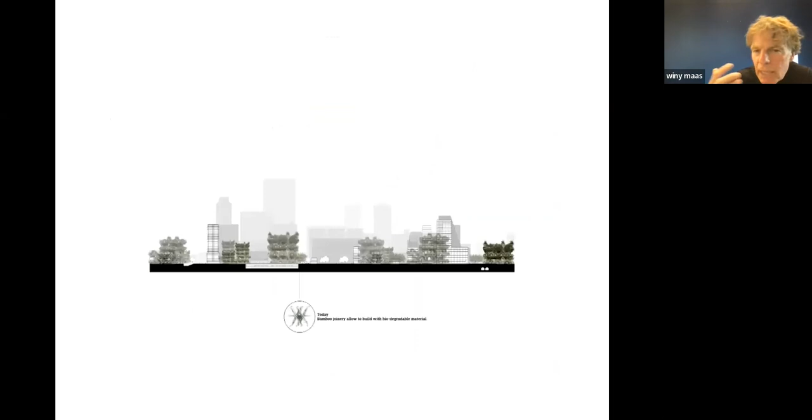If I do the same with trees, intervening and manipulating root systems and connecting systems, redoing them from algae in the beginning to willows and other species in the end, then you start to have algae buildings that gradually become more plant-oriented buildings. I know this is a silly example, but it would be a beauty if it could happen.

And then I transformed Manhattan a while ago into a place that grows and changes over time. Then I would sublimize basically all these components into one direction.

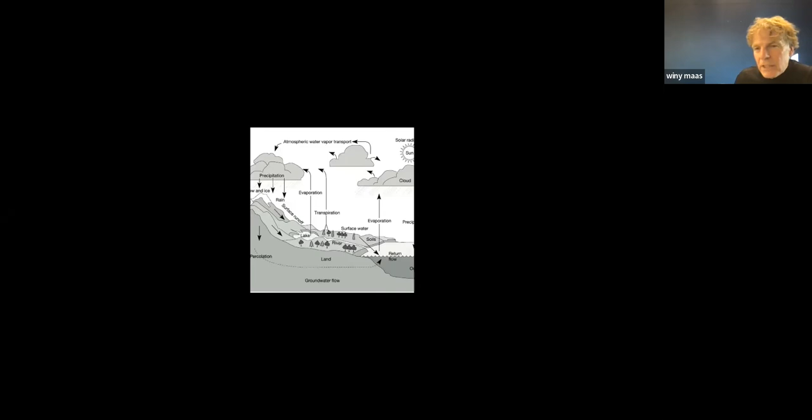With that, I hope to illustrate how we can intervene in this cycle with these ingredients, how we have to calculate and monitor them to be sure how much we do. That extends BREEAM and LEED at that moment and turns it into an international device. I hope that urban space and architecture, as a device within that, can help work on climate change and become the new contemporary urbanism as you demand for it.

I thank you very much.